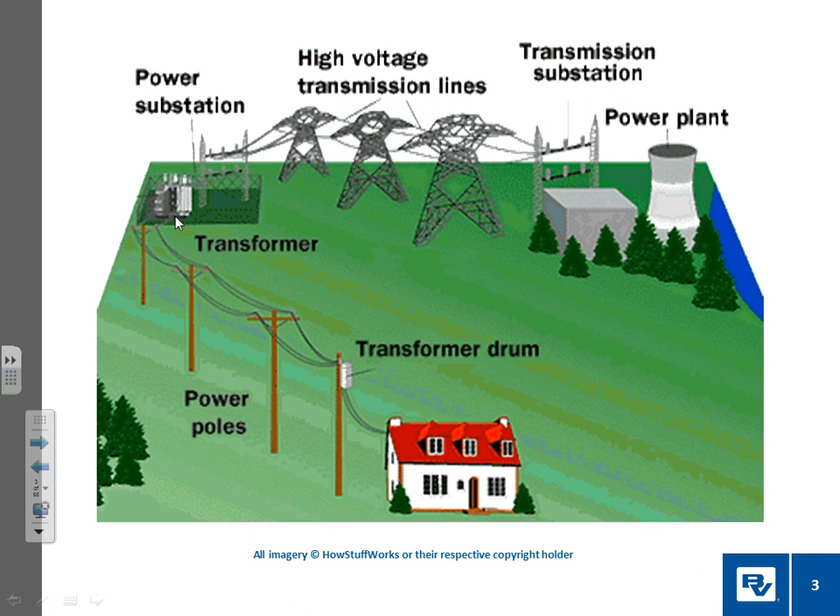So we have clients that are utilities, and we're developing drawings and specifications to build those pieces of the electrical grid. And we kind of break that down a little bit more, but when we talk about power delivery, this is the portion, everything from the power plant out is what we deal with before you get to the distribution level. Yeah, and then we have a little video here that our HR group created for us. It's pretty neat, so we'll show you that as well.

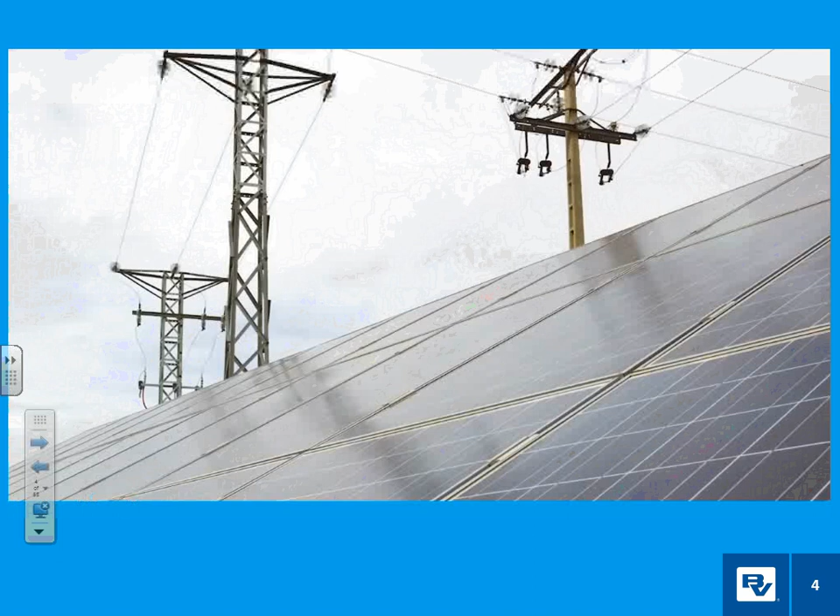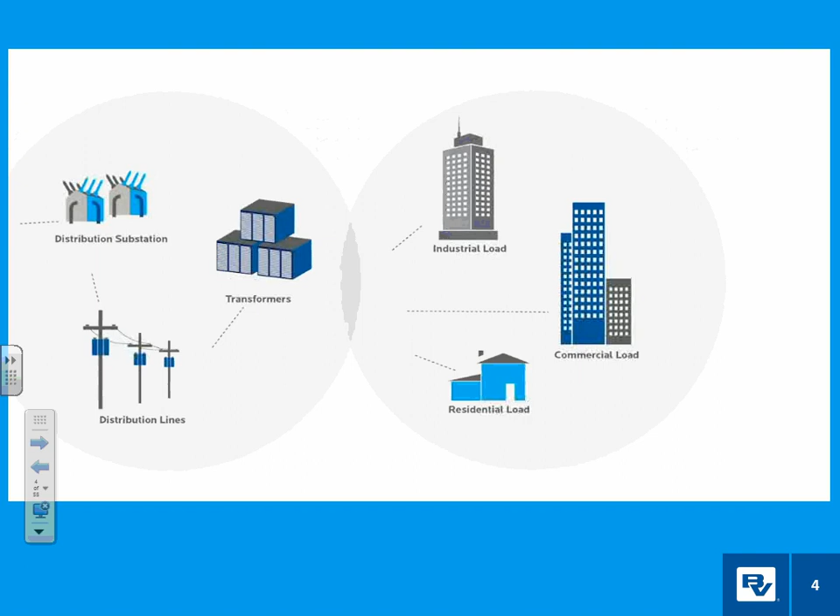For over a century, the transmission grid has been the backbone of the electric power industry. With the integration of new generation sources and smart grid technologies, as well as the effects of evolving technologies into this aging infrastructure, there are more demands facing the grid than ever before. For decades, Black & Veatch has provided our clients with creative solutions needed to overcome these complex and ever-increasing challenges. With power delivery offices nationwide, we have the local resources to quickly respond to our clients' needs. Black & Veatch provides enhanced coordination and communication, as well as a thorough knowledge of regional challenges, enabling us to tailor innovative and cost-effective solutions. Our clients rely on us to provide services for every step of the project lifecycle, from project development to engineering through construction and asset management. We offer both union and open shop construction solutions, as well as construction management services, all while maintaining an industry-leading safety record.

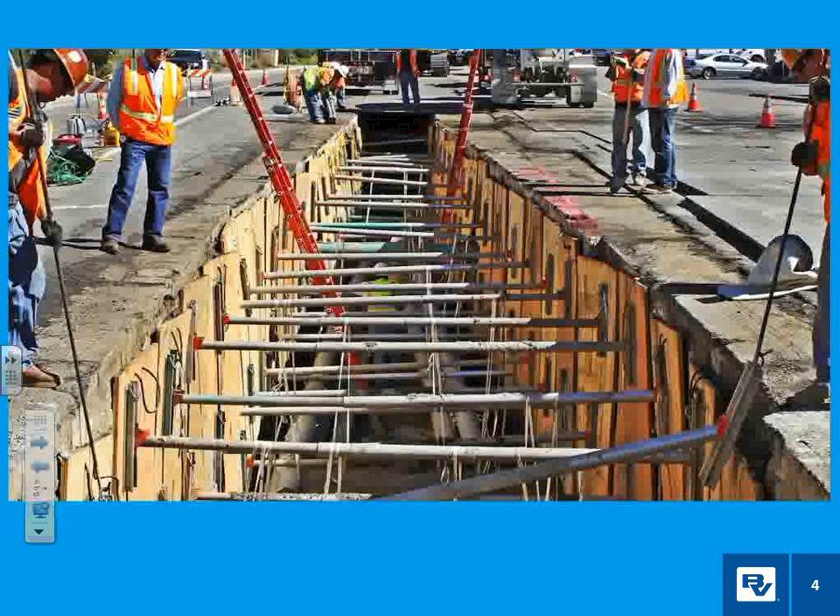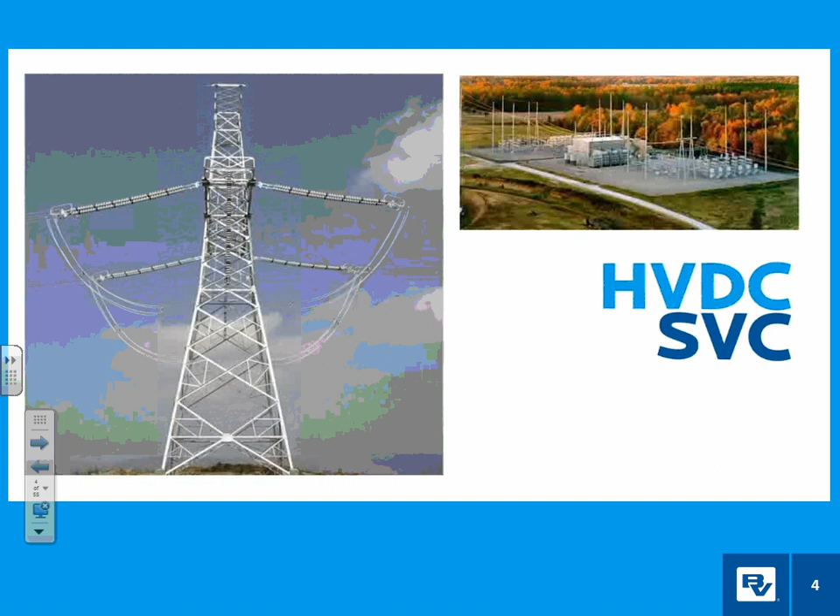Black & Veatch's power delivery expertise is extensive. We provide and implement creative ideas to ensure reliability and meet cost and schedule requirements for overhead and underground transmission lines, as well as gas and air-insulated substations. We have successfully completed HVDC, SVC, voltage and VAR projects, performed power system studies, and supported the integration of renewable energy and smart grid technologies. At Black & Veatch, we maximize our clients' resources with our comprehensive project and program management solutions. The success of our projects is the result of our close working relationship with our clients. We strive to be a trusted partner, customizing our solutions and service offerings to each client's unique needs. Black & Veatch's experience is broad and varied. As an industry leader, we are consistently ranked among the highest for transmission and distribution in Engineering News-Record publications. We have the expertise to provide our clients with the results they need time and again.

So that was kind of a lot of information there in that video, but it's good to see all the photos and stuff of the transmission lines and substations and everything that we worked on. As the video mentioned too, we're in the top 500 in a lot of categories as far as all the fields that we do at Black & Veatch. Power is our group and we're ranked 3rd, so doing pretty well in that category.

As far as a small office feel, that's kind of what we have in Bloomington. Our group is like 27 people right now. So even though we work for a bigger company, we all know each other pretty well. And it's kind of a nice feel.

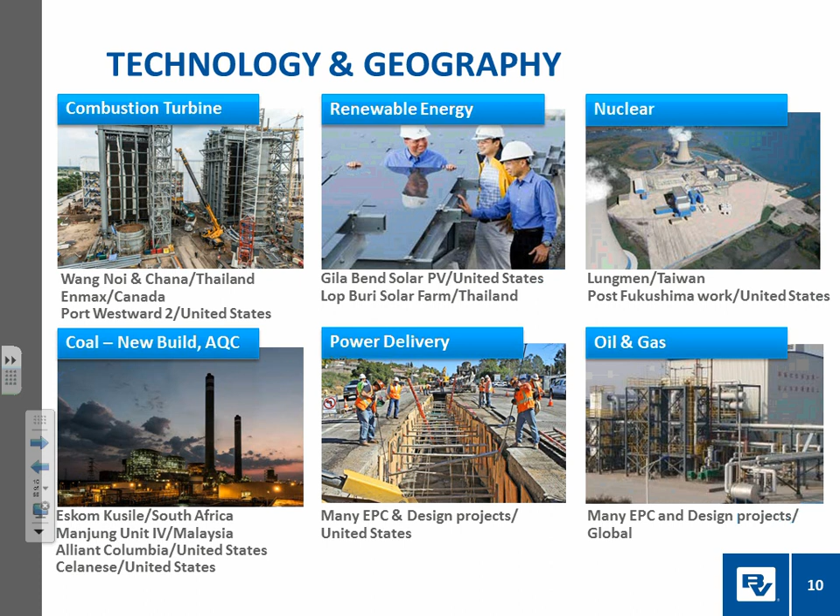So this is different portions of energy that we're involved in. So beyond just power delivery, which we already talked about with what we do, we touch on the generation of coal, using oil and gas, nuclear, combustion turbines, and renewable energy. So those are the pieces of the company that we don't necessarily deal with, but we'll delve into power delivery a little bit more. So here's the power delivery slides that we have.

When you need to put things close together, you're not using coated wire, you're using bare cable running the transmission lines. So in order to do that in a small space, they have different technologies. So gas insulated switchgear, where you can put gas around it instead of plastic, and so you can put things a lot closer together. So we're dealing with technologies like that, installing either that or air insulated switchgear, but again, integrating all these different types of things for our clients in many different areas.

Using smart grid technologies and things too. The renewables is a big push nowadays as well. So these are all things our office is involved with.

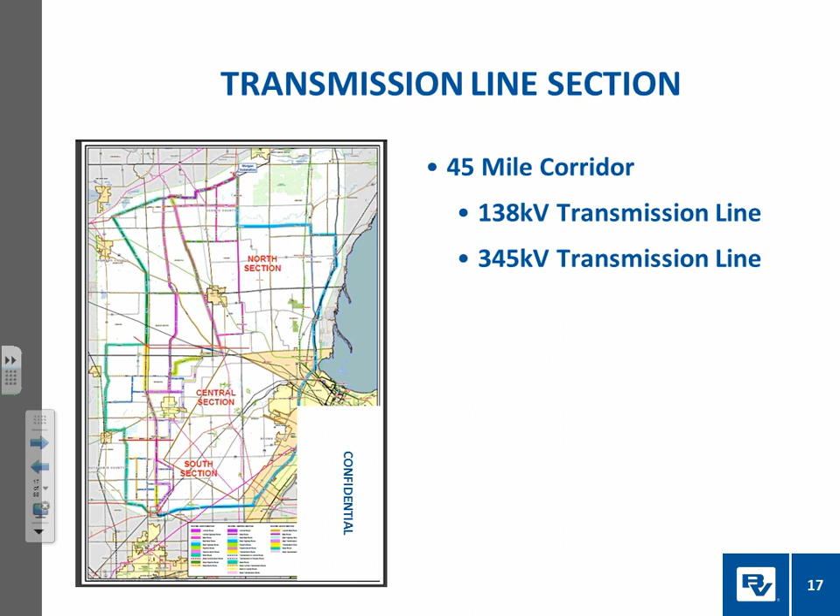And PLS-CADD is also a software that they use for transmission line planning, and I have some more slides coming up on that. So this is from a project that the transmission side did. It was a 45-mile corridor of brand new lines, and they had to do all the planning, routing, right-of-way acquisitions, and everything that goes into engineering a new transmission line like that.

So here you'll see the PLS-CADD models that they use. It can generate these profile views. You can see the TIN here with the topographic map. There's the roadway here with a cloverleaf, and then here's all your wires and transmission lines. So you can use the software to generate all that kind of stuff.

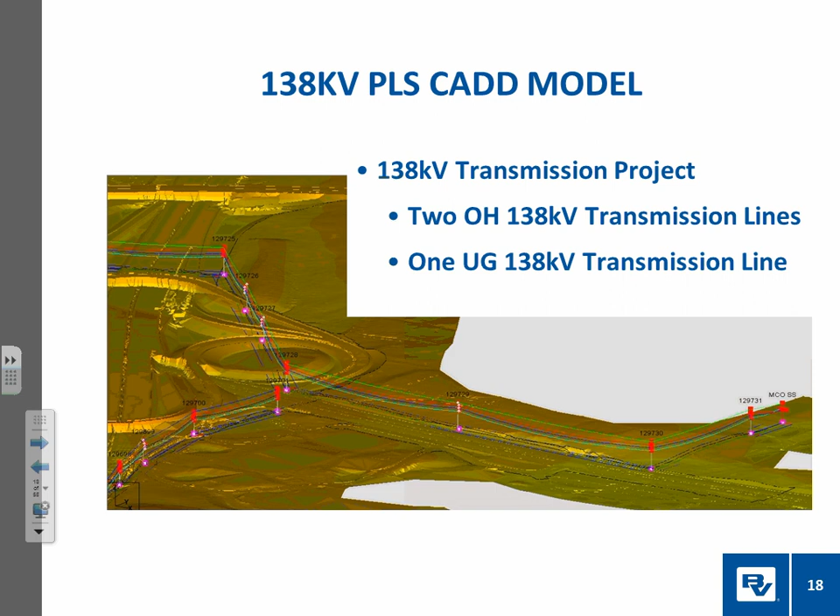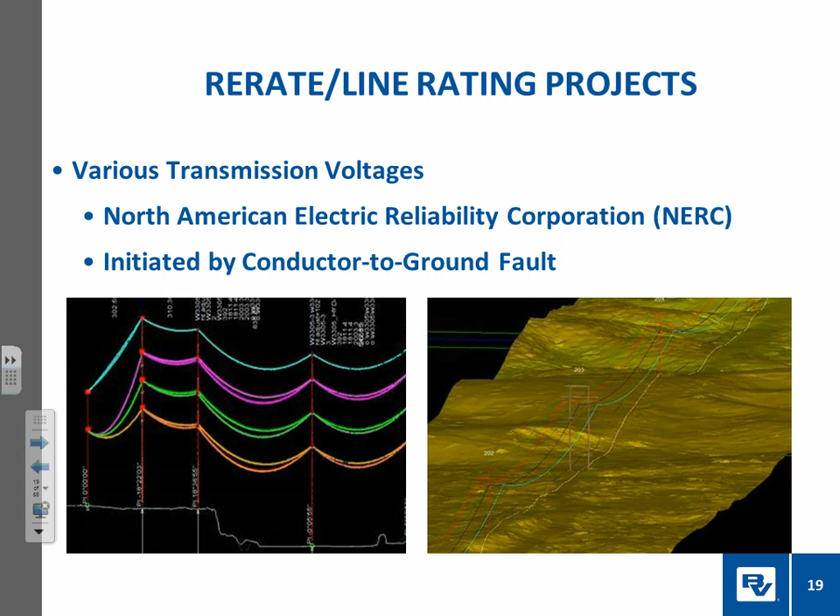Also in PLS-CADD, you can do plan and profile sheets, like the one on the left there. This was a line re-rate project, so they basically got all the topographic information and made sure that none of the lines were sagging too low over the years for clearance issues. If they were, they might replace a pole, or regrade some dirt, or whatever it took to correct the problem.

So that's a brief overview of the transmission side, and now we're going to the substation. We have 3 types of drawings in substations: the civil package, the electrical package, which is your physical stuff like all the steel and the equipment, whether it's outdoor or indoor, and then the controls, which control all the operations of the systems.

So here's a standard grading plan. You can see the site's graded out relatively flat, and everything slopes away really gradually. That way, when they build the substation, you don't have too much grade change for all your equipment, so you don't have to do a bunch of steps on a rigid bus and things like that. Ponding, tree clearing, grading the slopes. It's a relatively simple grading plan.

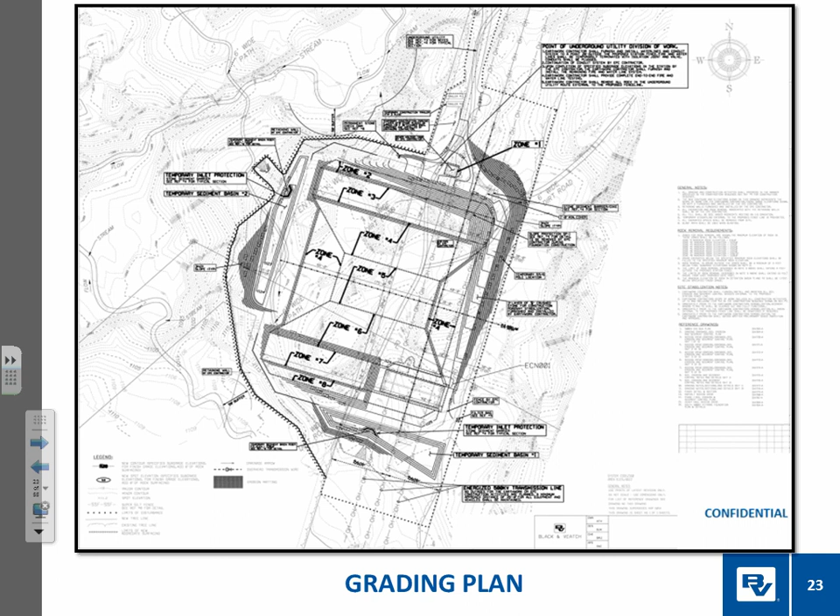And then here's some grading details. You have the section for what they would call the pad, where all the substation equipment is located. You have your trench details for pipes and conduits, and flared end sections and things for the driveway. So I just want to show the standard details of what we would put together for that.

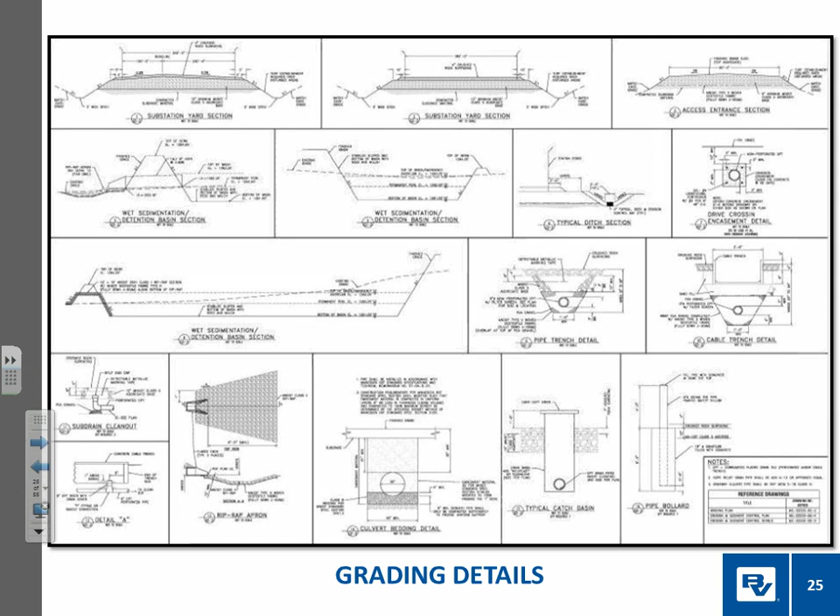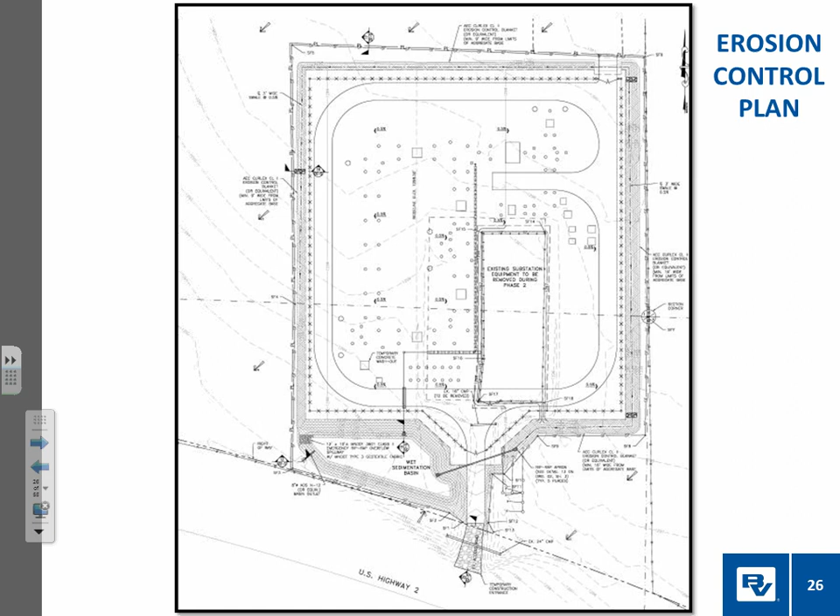And then you have the erosion control plan, which looks quite a bit like the grading plan, but along here, this is probably an area that we're going to seed, and we're showing seeding or blanketing, riprap, check dams, all your erosion type stuff. This shows just the details that you'd have. You have your silt fence details over there, your rock check dams and things like that, construction entrance.

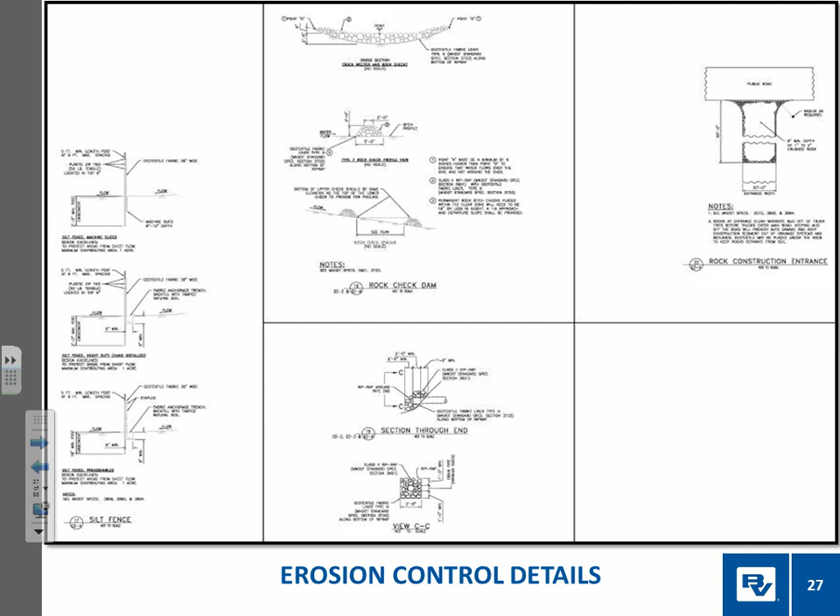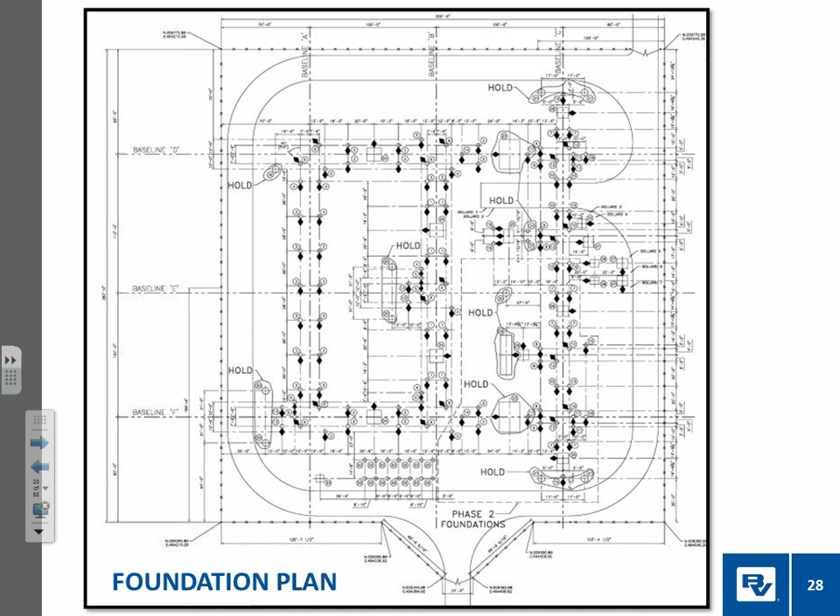The next step then would be getting the foundations all set up on a plan. So you see we lay out all the foundations, we dimension them, get the fence in there, the driveway, and show everything as an overhead plan for the foundations and where they'll go, so they can get staked and put in the proper spot.

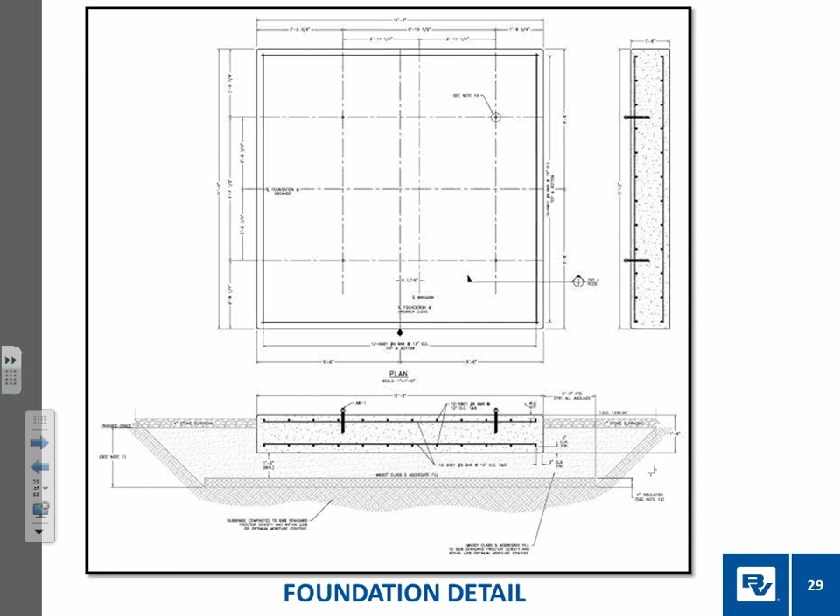Here's a typical slab detail for some piece of equipment, probably a breaker or something. You can see the rebar and stuff in the concrete. So you have your concrete slab, you have your anchor bolts. Here's all the section that they would clean out and put good select fill in there. You have your top view. It's all detailed out, like where the anchor bolts would go and stuff like that.

And then once you get your foundation details created, you can move on to your drilled piers. That's for the smaller equipment with stands. You'd either have a drilled pier or a spread footing. Spread footings are coming up here, but basically the drilled piers have different diameters, different bolt patterns, and your anchor bolt cage details. It's all in the chart for the sizes and how much rebar and all that.

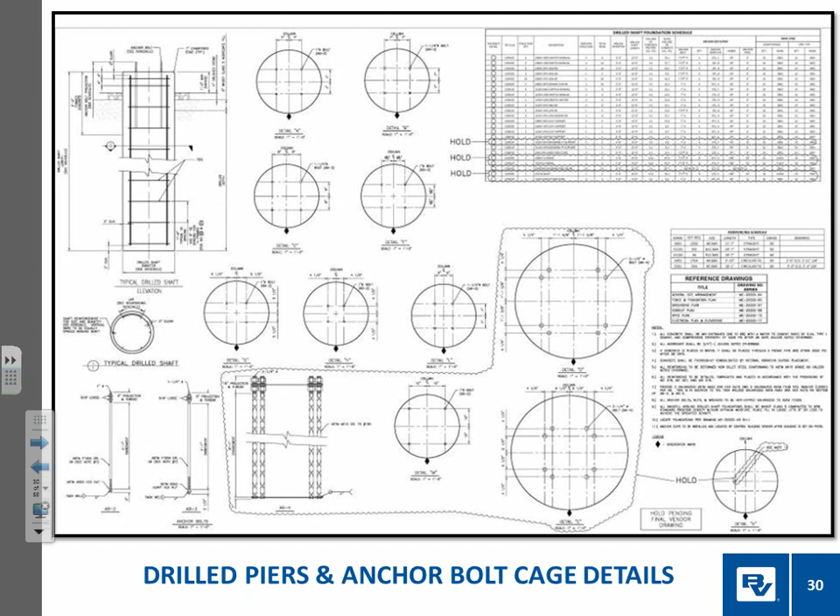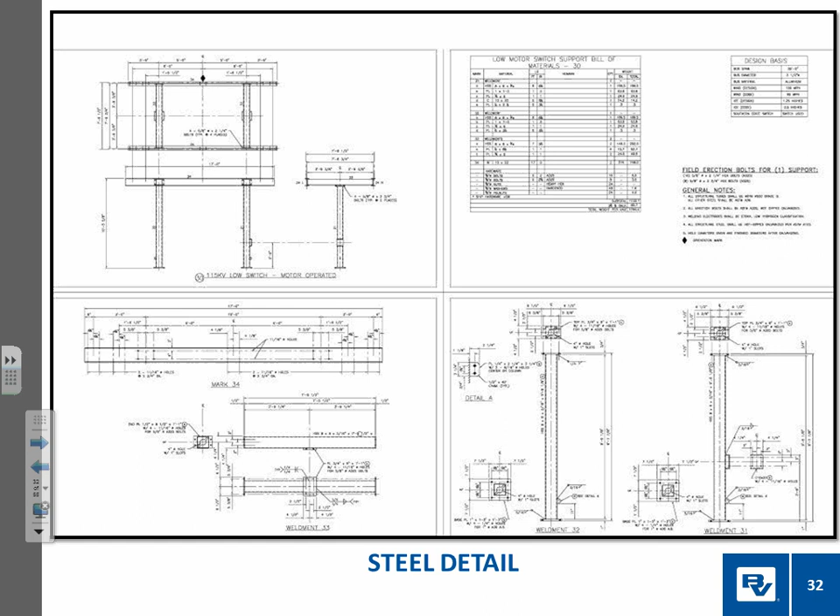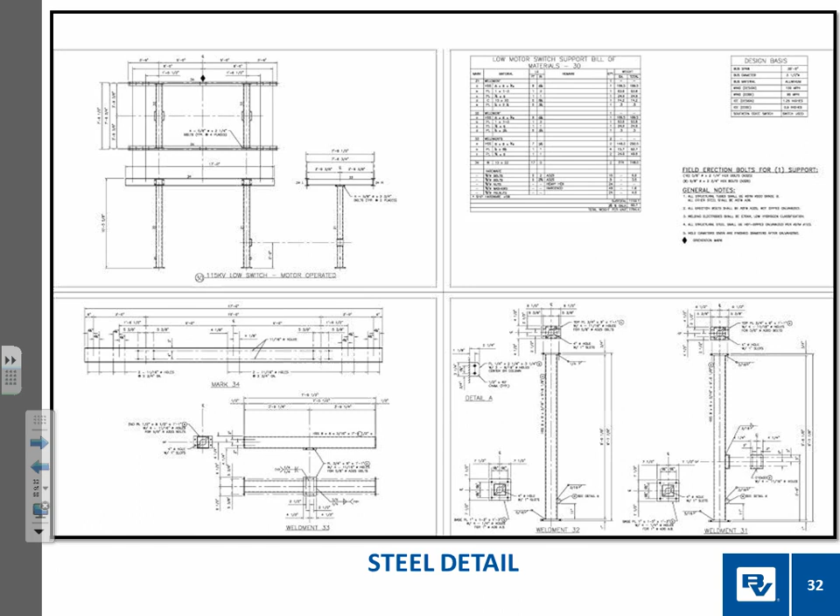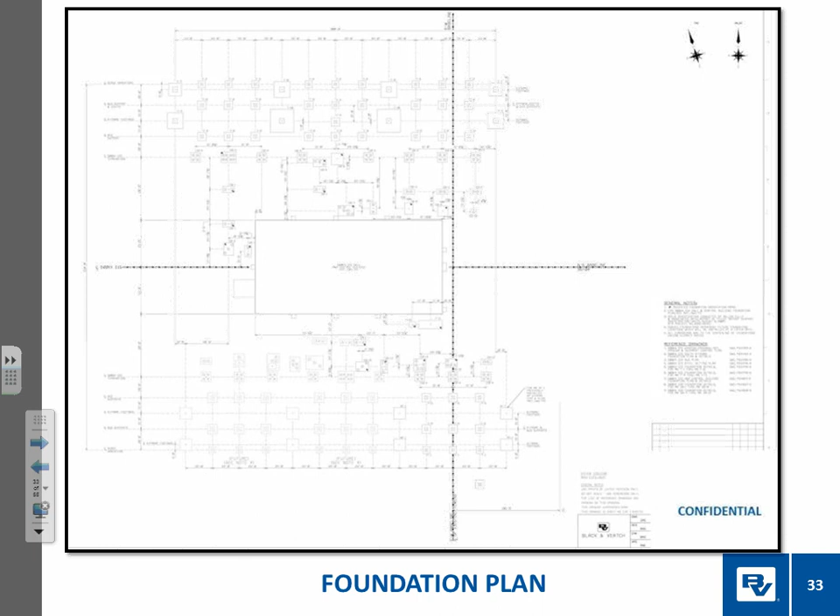General notes, design criteria for loading, and then this here was a foundation plan for a GIS hall that we have some pictures of coming up, so I just wanted to throw this in the slide so you can see the area. It doesn't come out the greatest, but the GIS hall is right here, and that's indoor, and this is all outdoor with all those similar foundations that we showed before. Yep, so all that equipment's on the outside and that's on the inside.

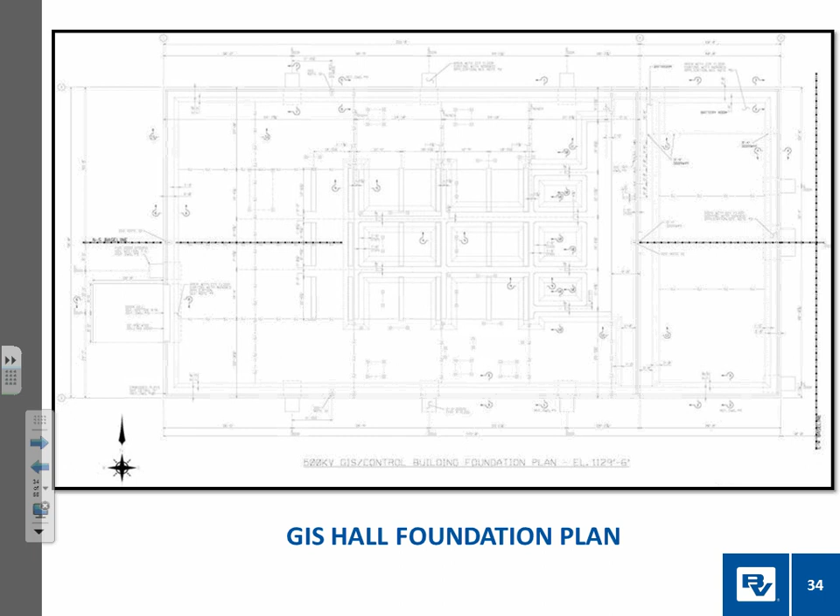And here's just a zoomed in view of that GIS hall. It has some trenches in here for the control cables and stuff to run, and I'll show you in the picture here. It gets a lot better.

And then here's that spread footing that I was talking about. You can see that it has the bottom piece here that will be underground, and then you have the raised pier. So in this view, looking from the top, this is what would be buried, and these would be exposed, above grade for the equipment stands to sit on. And as you can see, quite a bit of detailing, letting the contractor know where all the rebars are going to go and where the anchor bolts all need to be.

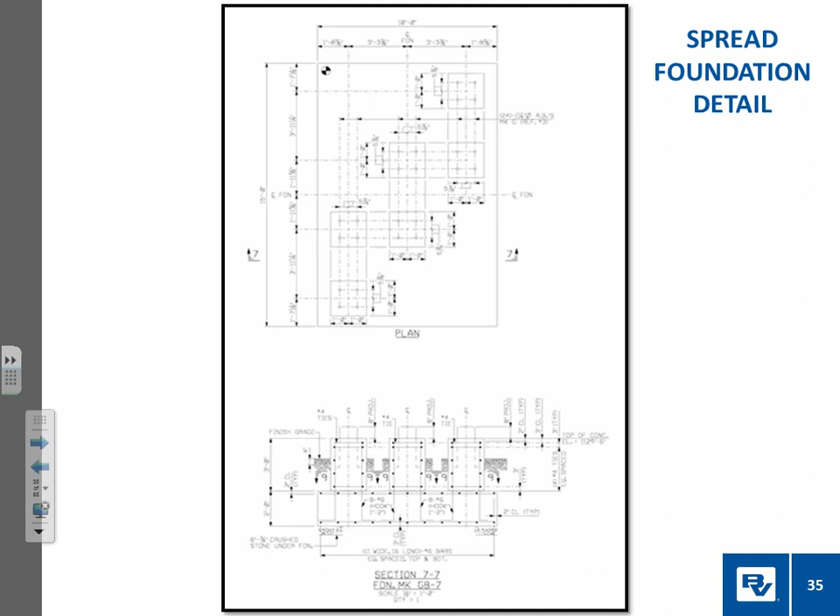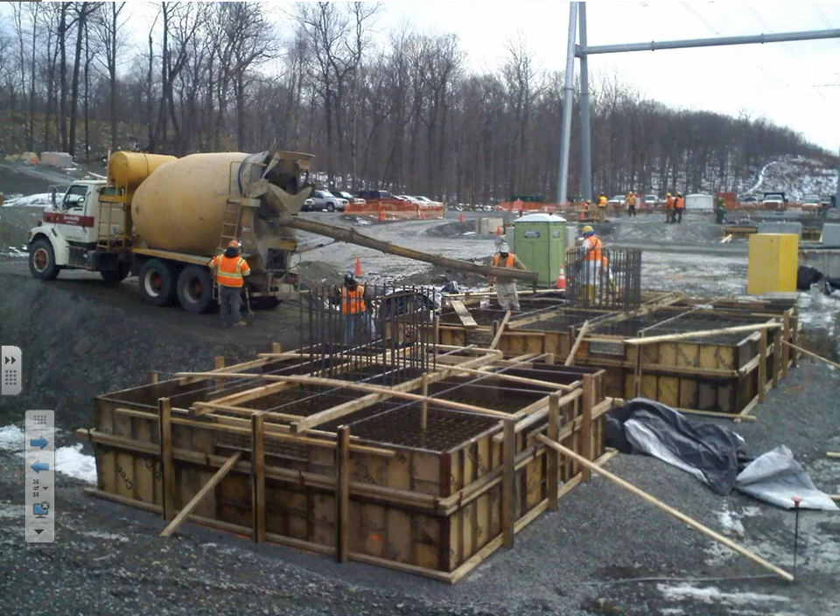So here's that same site that I showed you the grading plan of. It's just rough graded out here and getting ready to start to pour the foundations. There's your spread footing. You can see this is the piece that will be buried underground, so that was in the detail. And then this is the raised portion of the pier that'll be above grade for the equipment to mount to.

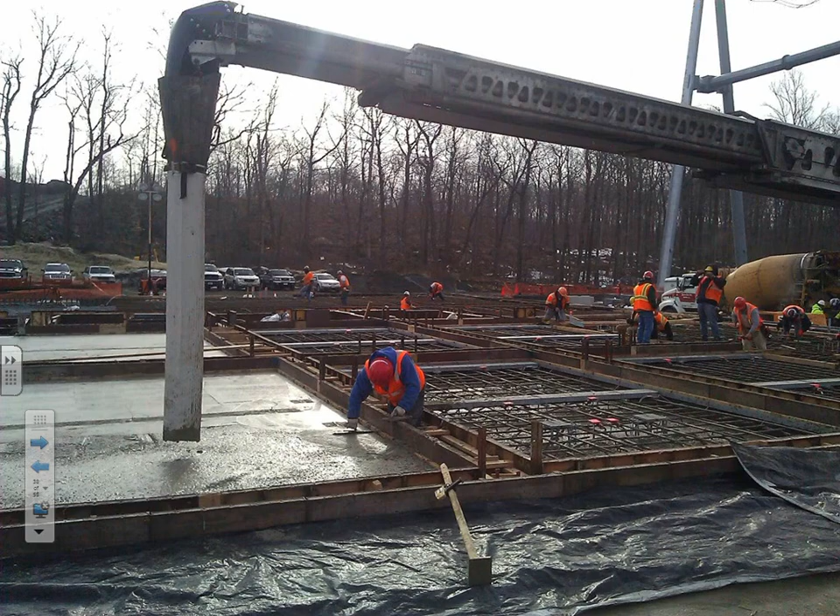So here's that GIS hall, and it has the troughs here for the cables to run in. I think also they do that so they don't have to pour so much at one time. I think this took 3 days to pour, I believe. Continuous concrete trucks. Yeah, it was non-stop.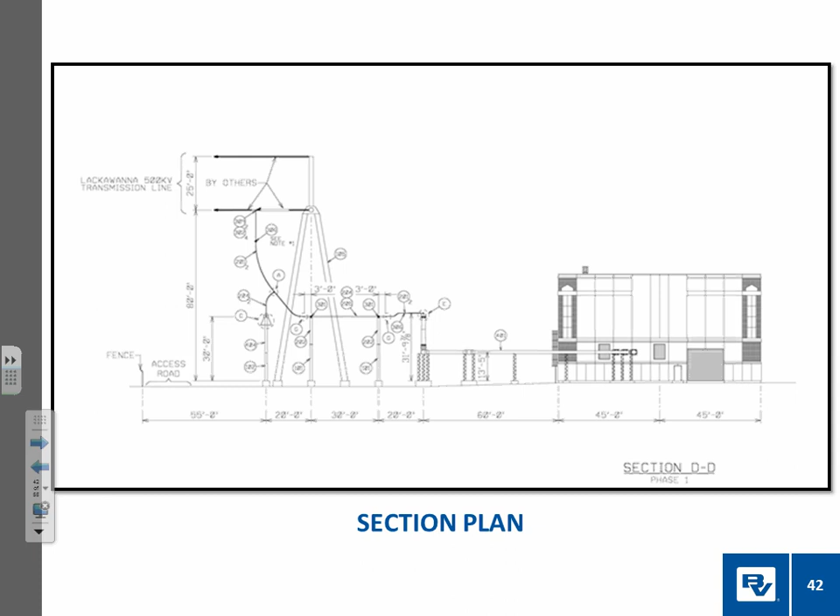But yes, this is the building that the foundation that they poured is going to go on. And each one of these little blocks here are those spread footings that were poured. And then there's that GIS hall that we showed you the photos of. And if you go back here, you can see the overhead of all the equipment that's in that GIS hall.

And that, as Katie said earlier, is due to the size of the site. They need to contain that all in that room. It's much more costly to build a GIS hall, but it's more efficient land-wise. So out east, they're using them quite a bit for available space.

Oh, that's funny. So the spacing that you see here, obviously you can't see the dimension, but this is ABC phase, 3-phase. It's a 500 kV yard. So if you look at these two lines right here, that's all the spacing that's required when you have gas in between. Just to understand the scale, it's about a fifth of the scale when you put gas in between. So this would have to be 5 times as large if you had air insulated versus gas insulated.

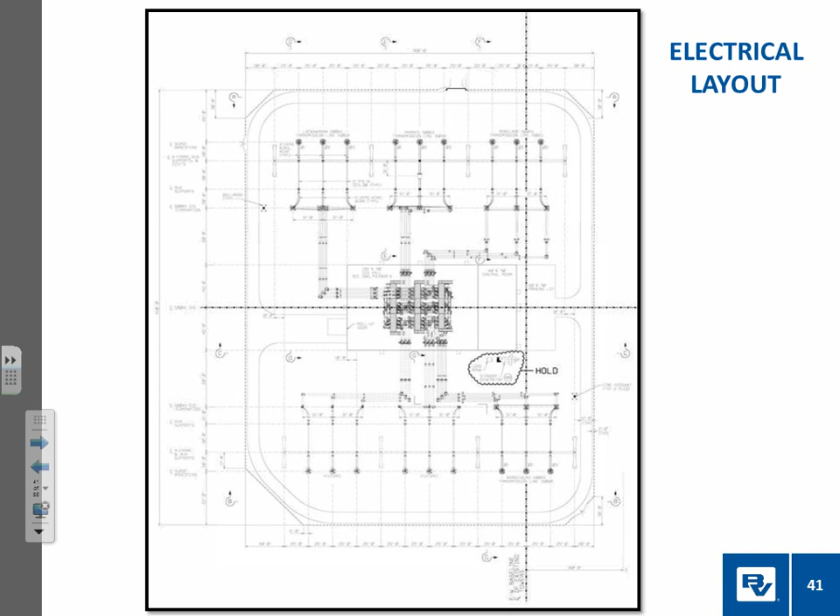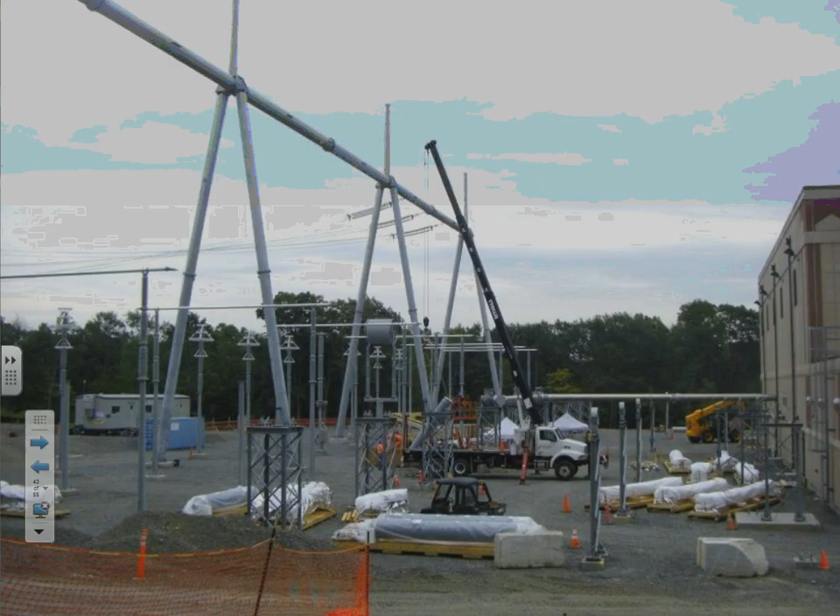But these are the big A-frames that were used. The strain bus, the flexible conductor that is being strung from tower to tower, is going to land here and then come down to land on the rigid bus. So that's the transmission line heading out of the site to go to the next substation. And like Kay said, the conductor will drop down into this equipment. There are some more slides coming up to show that as well.

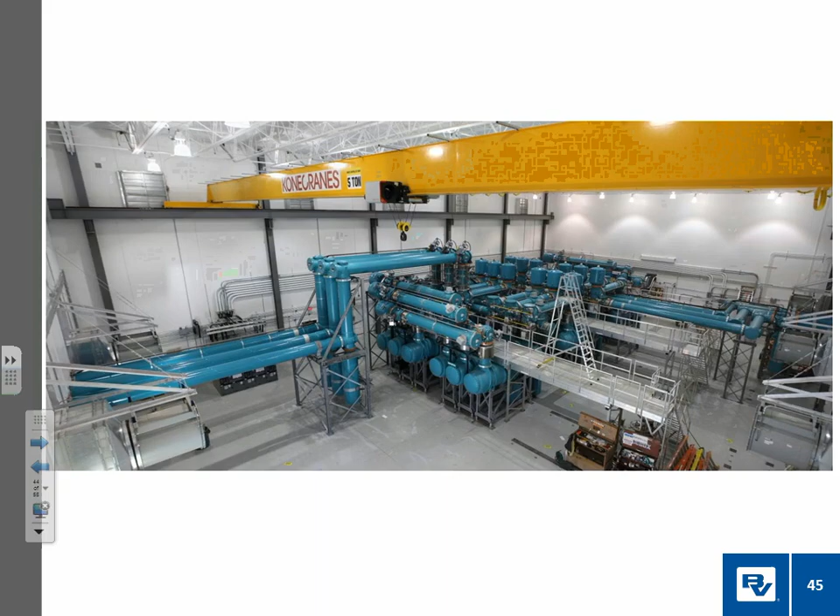This is the inside, so you can see the gas insulated switchgear is the blue stuff, A, B, C phase. There are breakers, there are switches, there are a bunch of other configurations. So basically they can connect the grid in a bunch of different ways. In case there's an outage in one area, they can switch the way the power flows across the grid.

So that's basically what the electrical department drawings cover, and this will be what the controls drawings will cover.

Probably a little more to do with what you did. I didn't include a lot of the schedules of the panels that will actually specify breaker sizing, and we'll do all of the breaker sizing, lay everything out, and then have someone else purchase it.

But these are the racks that actually go inside the control building, or the control room, and this will have all of the pieces that the client wants to control something. So this is to open or close these giant breakers and gas insulated switchgear, to measure or to read the current or the voltage at a different place in the

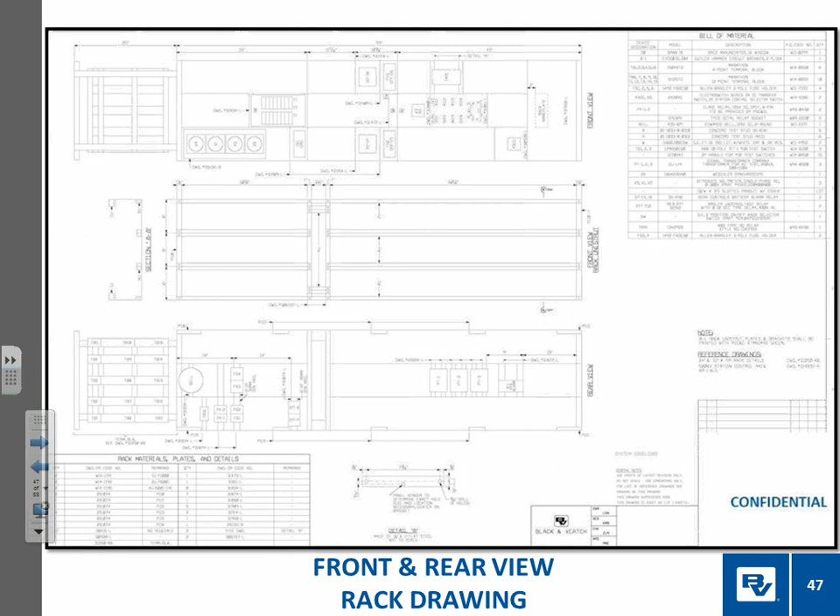So this is what it looks like in real life. So we sent that previous drawing to the manufacturer actually down in Iowa, and then this is what the client wants. If they want it green, they want it this big or whatever. So they meet all the specifications that we showed on the previous slide, and this is what gets installed.

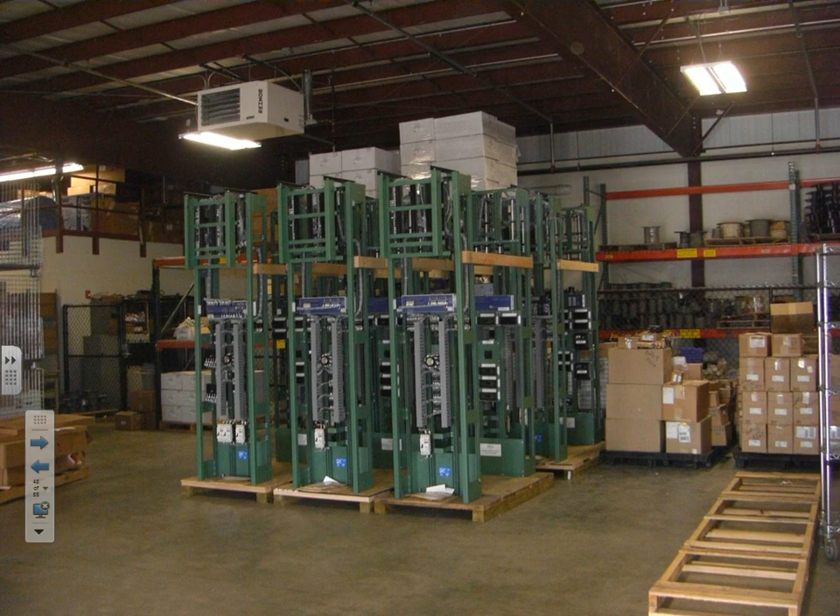And then this is a schematic, so it actually shows which switches close to energize the relay that's going to protect all of the equipment. So in case there's a big voltage spike, it'll tell which breaker to open, or if there's an outage or a down power line or something, it'll kind of control how everything interacts with each other.

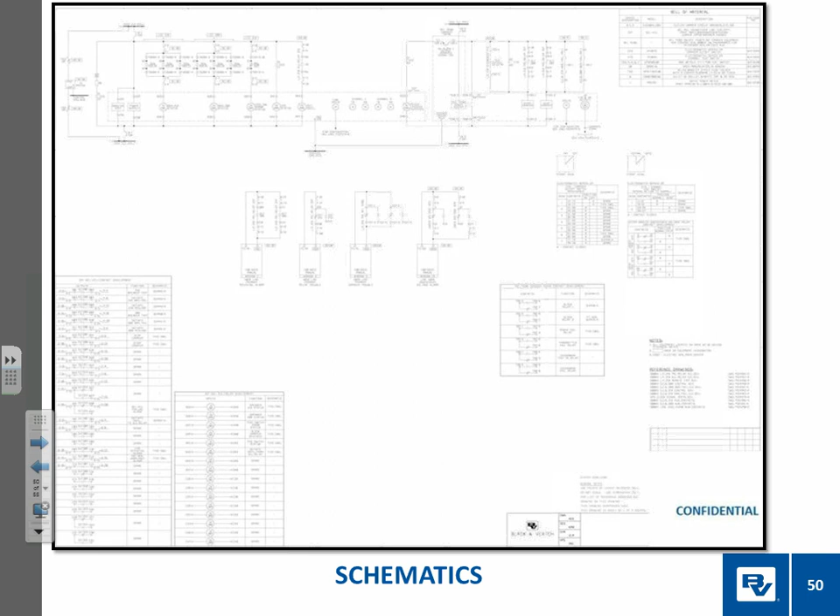And this particular project too, it was EPC, which is engineering, procurement, and construction. Our company also has a construction firm that they own, so we'll do EPC projects where we do all 3 phases, and that's what this project was. So we had somebody on site that was overseeing the electrical contractors that were installing every piece of the equipment that we specified.

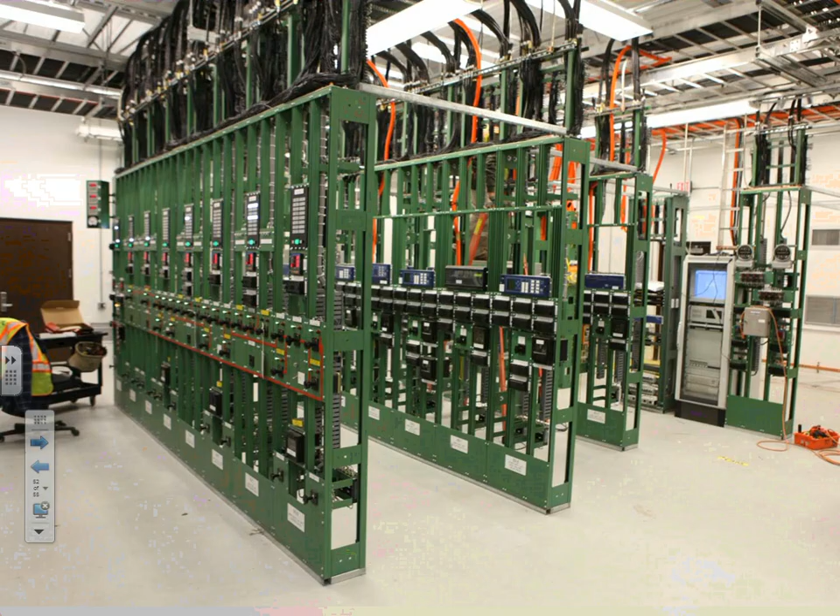So, kind of an overview of what we do, but we wanted to give you guys the drawings and pictures to give you a better idea of what we do. We're looking for people that are excited about the energy industry and that want to be a part of a growing company, a growing office, and a good future. Definitely, yeah. And competitive compensation and benefits. We have a 401k match. We're an employee-owned company, so however hard we work and how well the company does, it definitely benefits us.

Career development, we have things in place for training, and we have sponsors for when we have new employees hired on, so someone works with them to train them in. We have career development plans that we all fill out, and you say, here's what I want to do, and you go after it. And there's definitely a lot of opportunity to move up. There's, I believe, 10 levels alone for the engineering technician group, and then you can move into the designer group, and there's multiple levels there too.